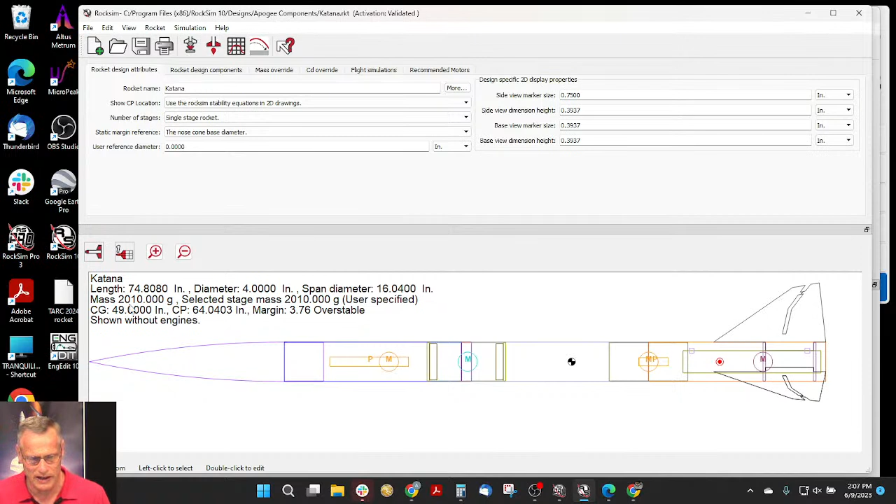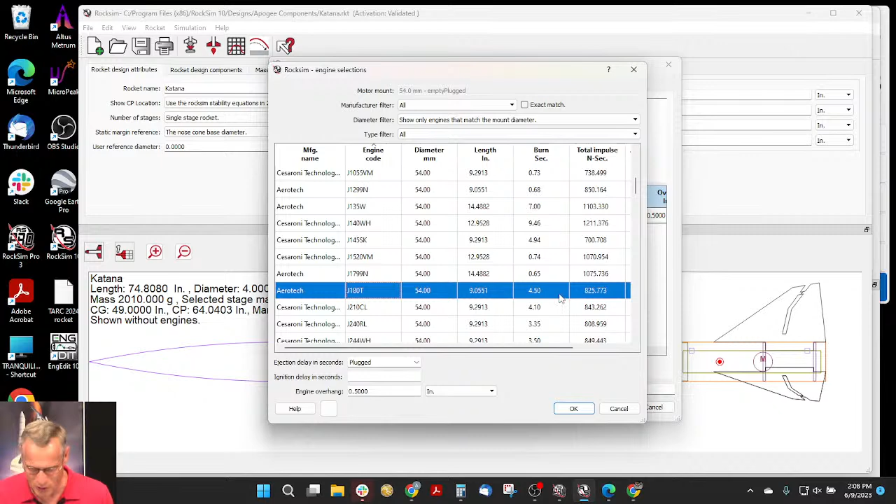So now let's load a motor in here and find out if RockSim does account for the casing weight. Let's choose an engine, we'll go with the J180, doesn't matter. If you look over here, it doesn't tell me the motor weight. But let's load the engine anyway, so we'll just load it and select the delay, 14 seconds. Click OK. So now we went from 2,010 to 2,850 grams, so obviously we added a motor plus the propellant into this rocket.

So now let's do a launch. We're going to go up here to the top, this is 'prepare for launch,' and this little icon is the rocket with two arrows pointing down to the launch pad. So we'll click on that, that's prepare for launch, and again we're back to where we were, we had the motor in here. Let's just set this up for a flight.

This is actually a dual deployment rocket, and we have a parachute and a 48-inch parachute. So I'm assuming this is the smaller parachute, and we'll deploy that one at apogee, and this other one we'll deploy at an altitude, so we'll scroll through here and specify an altitude of, I don't know, 600 feet, and hit tab. Okay, so now we've got our parachute set up.

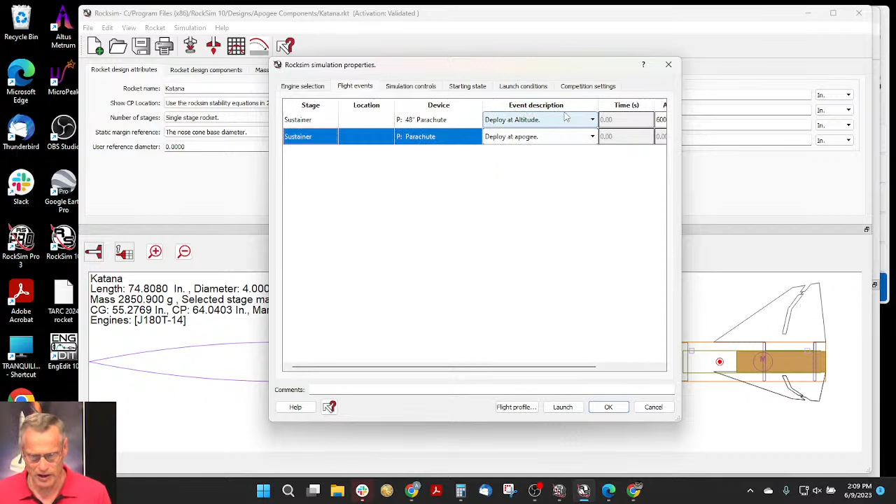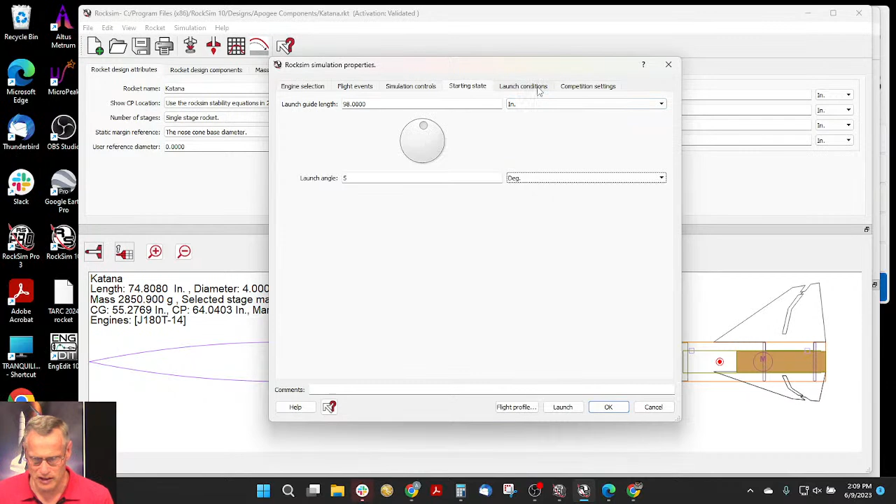The starting state, we need to be at a 98-inch launch rod, because this is a high power rocket, that's 8 feet. Launch angle, we'll give it a 5-degree tilt, so we're tilting that way 5 degrees, and launch conditions, we've got an 8-mile-an-hour wind coming through, and let's see the flight profile. So we're just running a quick launch here.

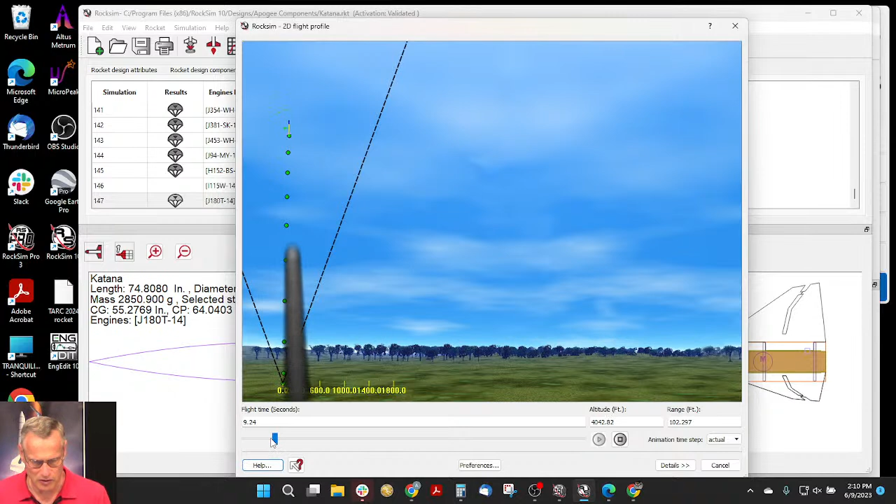So here's the rocket taking off, and the rocket's going up, and I'm going to grab the slider bar here and speed it through the flight. So we can see the rocket did come down. These dots are 1 second apart, so when the dots are going further apart, the rocket's accelerating, when they start getting closer together, the rocket's decelerating, and when they look to be about the same distance apart, that means it's flying at a constant speed.

So here's a constant speed, and it's coming down, and then all of a sudden it changes right here, the dots get closer together, which means it's coming down slower. So this is your classic dual deployment trajectory, where the small parachute allows it to come down really fast, and then the big parachute opens up right here, and then it comes down slower.

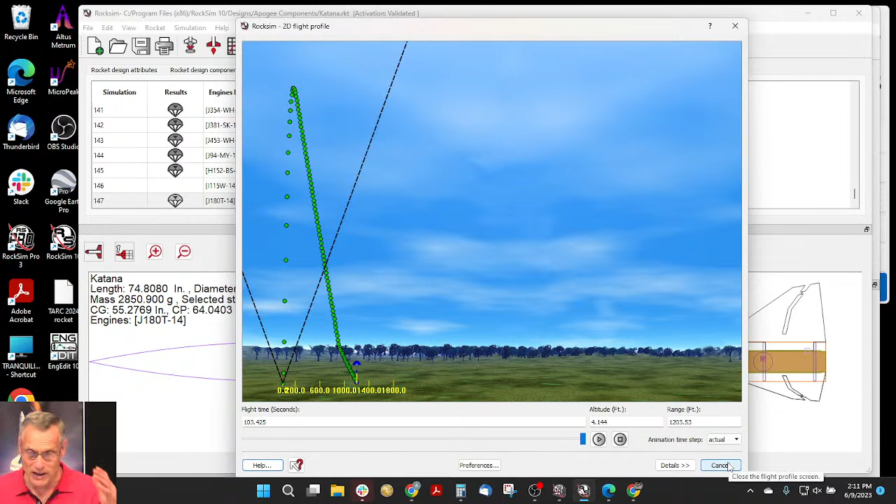Okay, so now, does RockSim account for the casing weight and the propellant weight? We already loaded the motor in here, and you saw that the mass changed, so now that includes casing and propellant, or casing, or just propellant. So that's what we want to know.

So what we'll do is we'll go up here to the graphs, this button up here, we'll go to plot. On the x-axis it's going to be time, and on the y-axis, let's find mass.

There's mass right here, and let's see if we can get altitude. Here's altitude, and then we'll clear out this one. Let's go to the end of the data, and then we'll plot this graph.

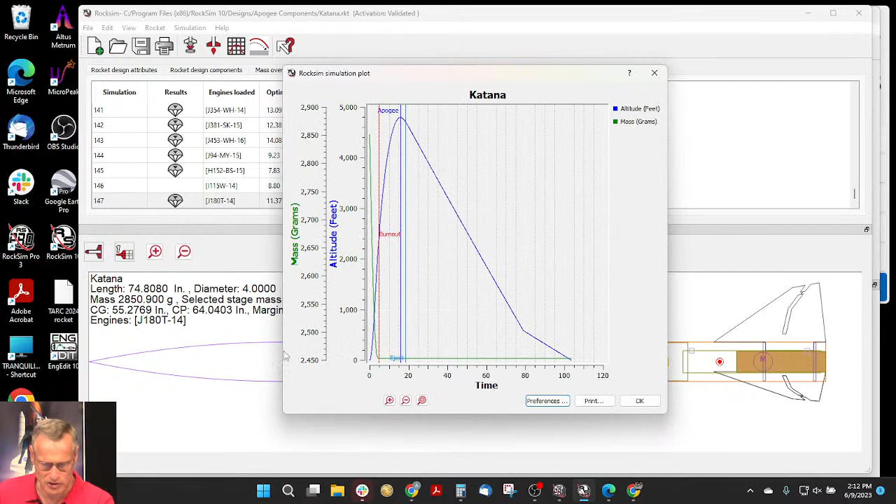Here is the graph. Let me make this bigger so we can see it better. This blue line is the altitude, similar to that trajectory, but this is altitude only, and you can see that it does slow down here.

What we're interested in is the green line, which is the mass. It starts at a high mass right here, and then drops down to here. Let me make this bigger so we can see it.

I'm going to stop this graph around 10 seconds, because after that the green line flattens out and the mass isn't changing. So to change this, we'll go back to preferences, set the graph data ending point to say at the following flight time, type in 10 seconds, and plot the graph. Now we're just looking at the first 10 seconds of the flight.

What we notice here is that liftoff mass is about 2850 grams, and then it drops down and bottoms out here. What I want to show next is the thrust of the motor, so I'm going to go back to preferences.

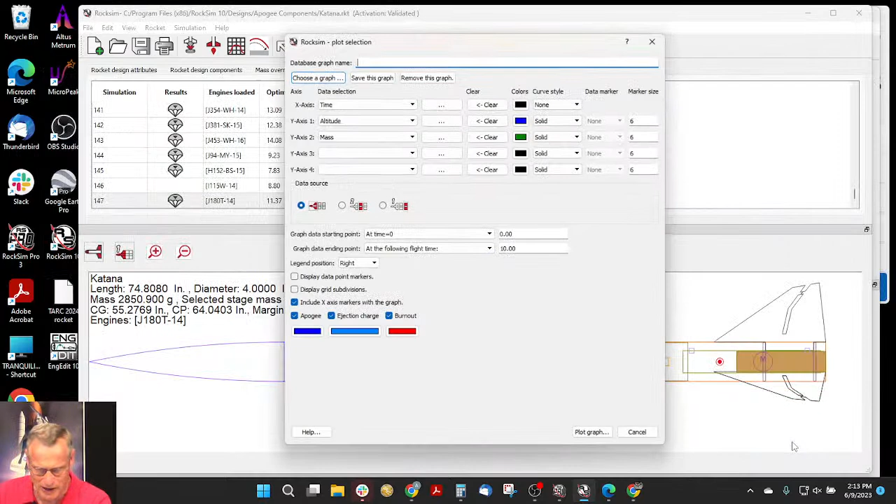I'm going to clear out altitude and put in thrust. Here's thrust, and then plot the graph. Now the blue line is the thrust of the motor, and we can see when burnout occurs right here.

This is our burnout, and you can see that the mass of the rocket is getting lighter and lighter until we reach burnout. At burnout, we're approximately 2,460 grams, somewhere in that area. So that's our burnout weight.

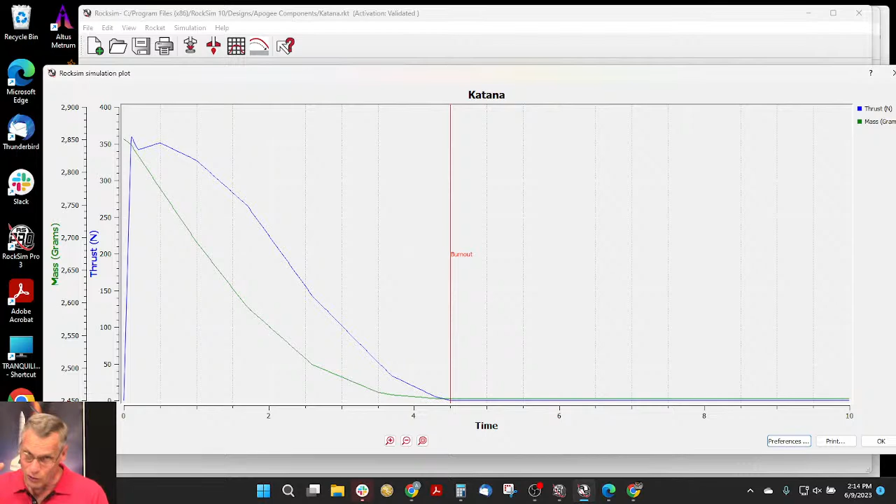But I don't know if you remember, when there wasn't a casing loaded, when we didn't load a motor, we were around 2,010 grams. Now with a full motor it was 2,800-something, but now we're down to 2,400. That tells me it's accounting for something—there's extra weight in there. I'm guessing it's probably the casing.

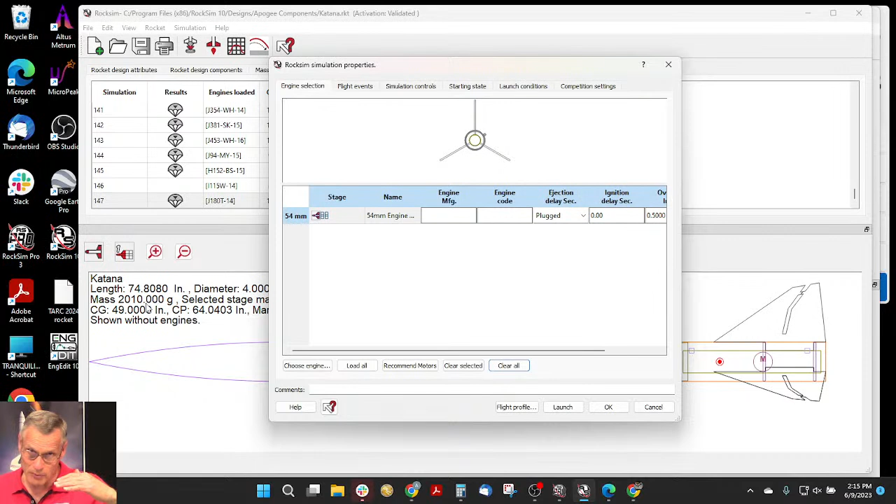So let me go back and take this motor out. Right now at liftoff we're at 2850, and I'm going to unload the motor, clear all, and it dropped down to 2,010 grams. Then when we loaded the motor it was 2,800 grams, and at burnout it was 2,400 grams. So that tells me that yes, RockSim is including the casing weight of the motor when you reload a motor.

So you don't have to do anything different when using RockSim when flying high power or any reload motor. RockSim knows the weight includes the casing and the propellant, and during the flight the propellant burns off and goes away—that's why we saw our mass coming down. So hopefully that accounts for the first question. It was kind of long, but I wanted to walk it through just to show visual evidence that RockSim is accounting for the casing weight.

The 3D printer guy says, being British, I hate the heat—anything over 20 degrees centigrade is too hot. Yeah, but do you have humidity? If you do, then it's too hot. If you don't have humidity, it's more tolerable.

Rosa is from Ottawa, and they're here. Carlos K says, bar quiz question: what is the oldest rocket engine that you have successfully launched?

I just found a lot of 20-year-old plus motors. I've launched some pretty old motors, if they're stored properly. What really hurts motors is humidity, so if they're stored in a dry container where the humidity doesn't fluctuate much, and the temperature doesn't fluctuate much, they'll last a long time.

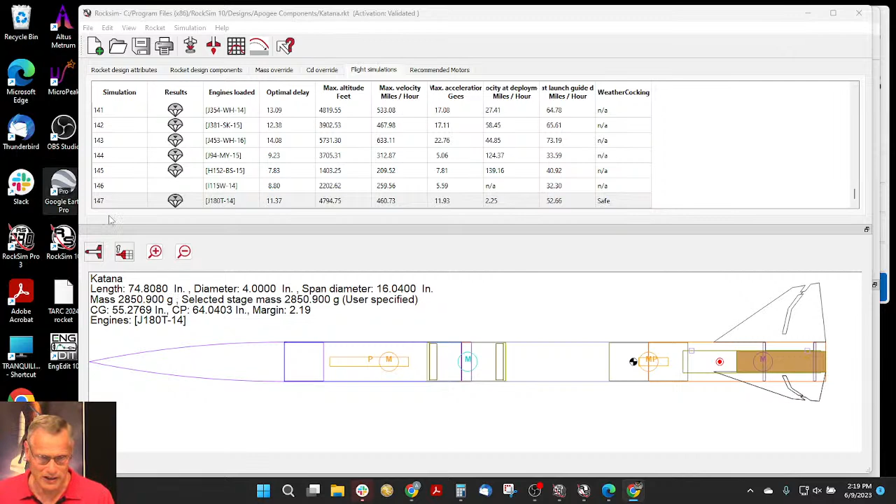I'm going to go back to the rocket simulation we just ran, and this time let's show velocity, and let's show, I'm looking for coefficient of drag. Drag, okay, CD. We can also plot the total drag force right here. Let's make this 20 seconds and hit tab, and let's see what's going on.

Our blue line here is the velocity of the rocket. As the rocket's taking off, it reaches peak speed a little before burnout, probably because we have a high thrust motor where most of the thrust is at the front end, so it's actually slowing down as it's burning. But at burnout it really drops off, and then it arcs over the top. This is apogee, and it picks up a little speed as it's starting to come down. Then at ejection, the parachute comes out and it levels off right here.

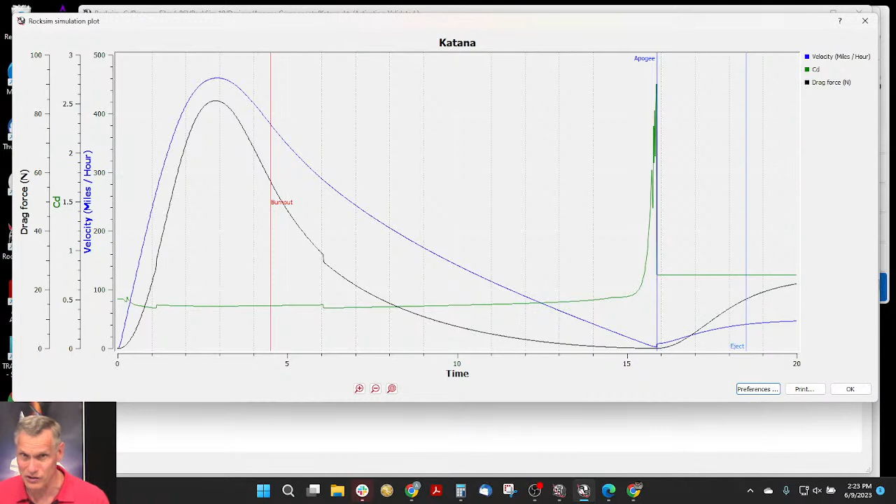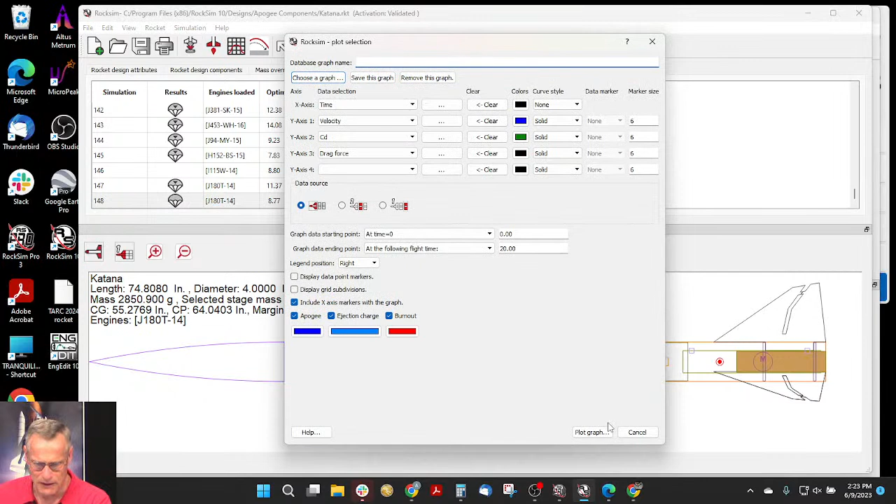One of the things you could do is go to the CD override right here, and uncheck this box, and then it will use this value, like 0.75. If we run a new simulation, the only thing changed between this one and the last is this one uses a fixed coefficient of drag of 0.75. So if we plot it, you'll see the line stays flat right here. See that drag coefficient line? It stays flat until it gets to really high angles of attack, when it starts to arc over as it gets closer to apogee.

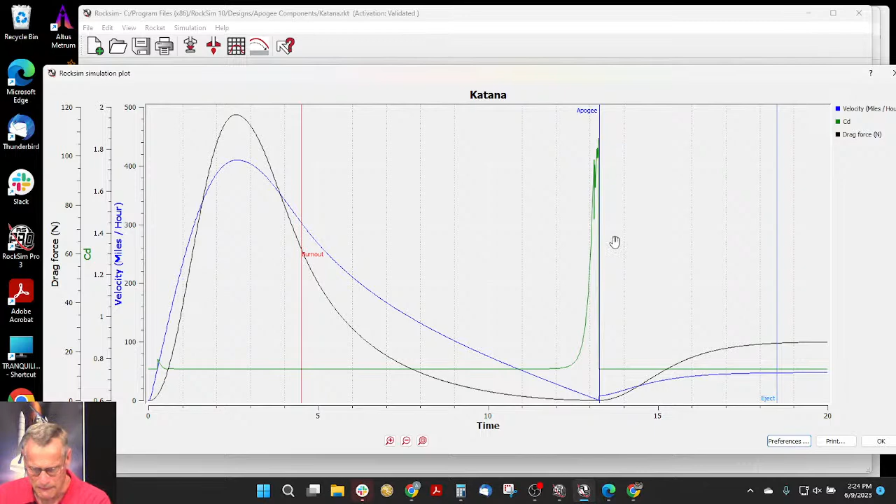So you can adjust the coefficient of drag. If your value, if here on this motor, the flight went exactly 4,000 feet. So how do I get to exactly 4,000 feet? You'd adjust that coefficient of drag. I need a little bit less drag to go a little bit higher. So instead of using 0.75, we could try 0.7 and then run the simulation again.

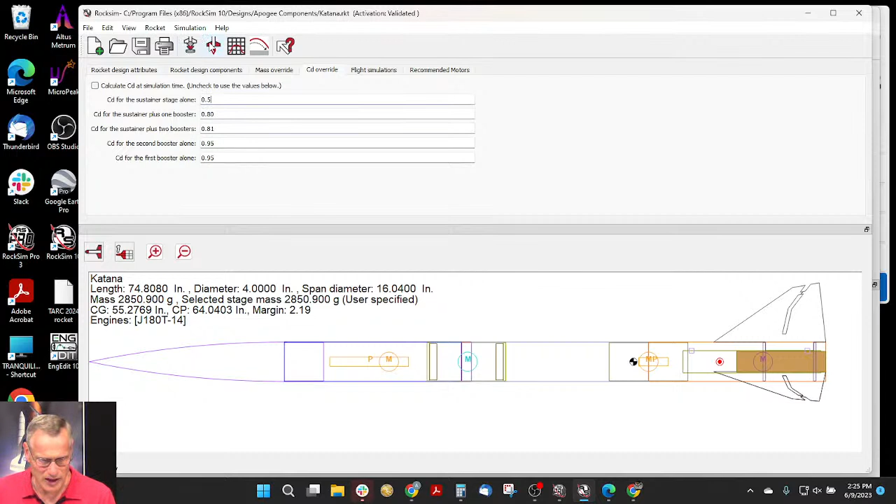And I went from 35 to 36, not quite enough. So then I'd come back here to coefficient of drag, and I'm probably going to have to use like 0.5. And try that. And now it's not too high. So somewhere between 0.7 and 0.5 is that value that we want to zero in on.

But then if you change a motor or if you change your launch conditions, you're basically throwing in more variables. It's going to be, no matter what program you use, it's going to be hard. I wish I had a better answer, but in reality, coefficient of drag is just so hard to predict.

Okay, Ashley says, okay, wait a minute. Arta Applewhite, wait a minute, I'm going, there's a lot of questions coming in.

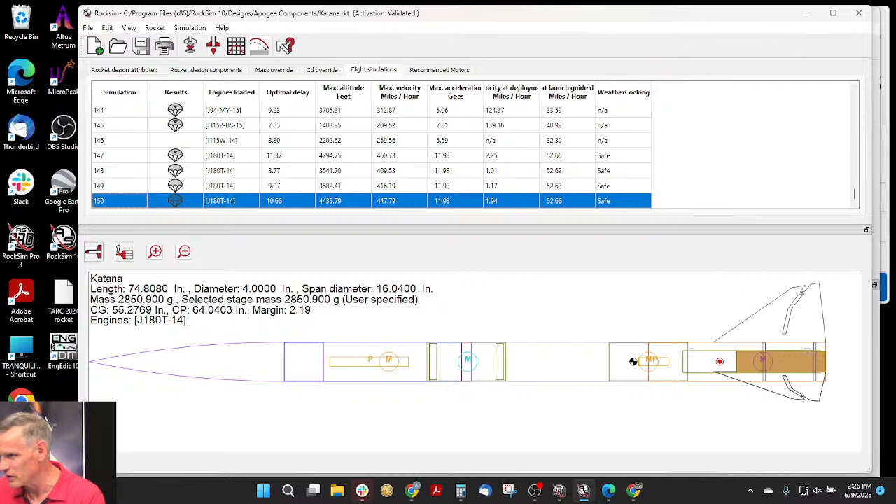Arta Applewhite says, follow-up question: how could I account for the weight of spacers in a reloadable motor? For example, a 1-grain G61 reload in a 3-grain case. Okay, so that's a really good question, Art.

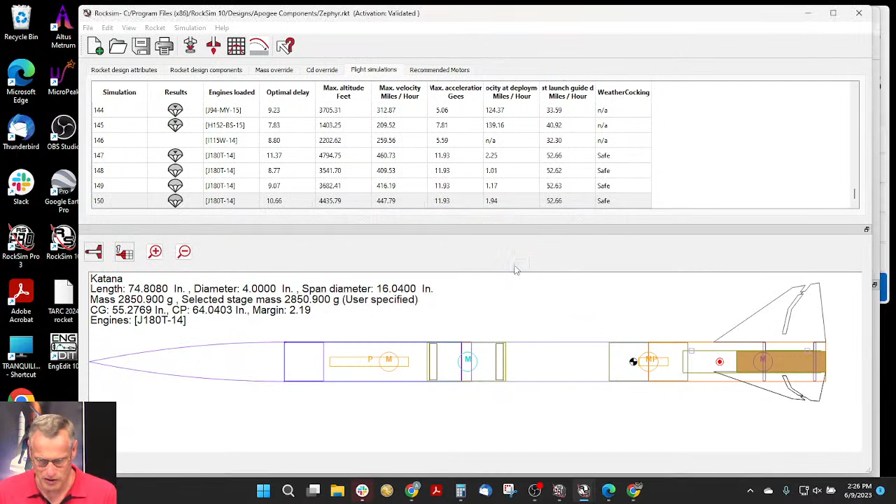Let's find a rocket motor that's a 38 millimeter. So let's go with the Zephyr. I know that's a 38. Save your changes? No, I don't care about that. Okay, so here's a Zephyr, and we're going to load in a G61, which is what Art is looking for. So I'm going to choose an engine, and here's the G.

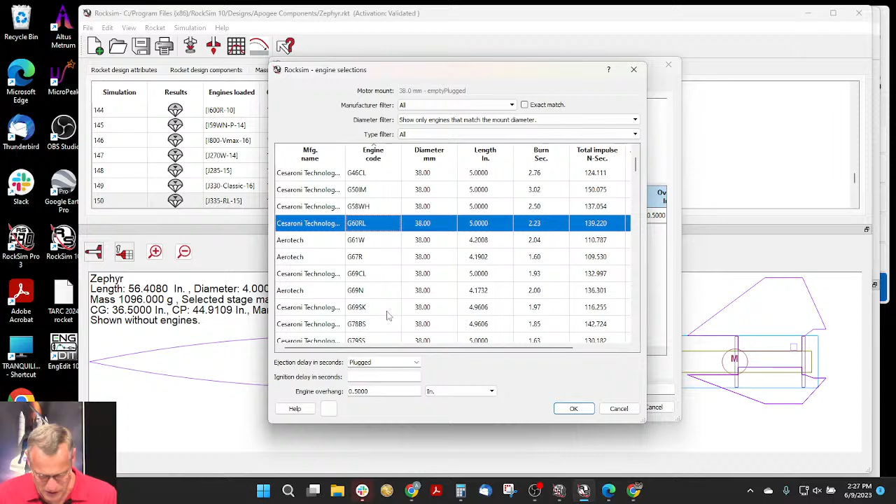Oh, he wants a Cesaroni. He's looking for a Cesaroni G61. I got a G60. Oh, let's go to the Apogee website and see if there's a G61. So on the Apogee website, just type in G61. Hit enter. I got an Aerotech, but no Cesaroni.

Oh, he is talking about Aerotech motors. I'm sorry. So here is the G61. So I'm going to go to the page, and I want you to note some things here. So the total mass of the G61 is 194 grams, and that includes the propellant of 61.5 grams plus the casing and everything else.

So a 38... I don't know what a 38-120 case is, the difference between these two numbers, because this is the case that it uses. Now let me open up a new tab. Okay, so now let's do an RMS 38/360. Okay, so here's the 38-360 casing.

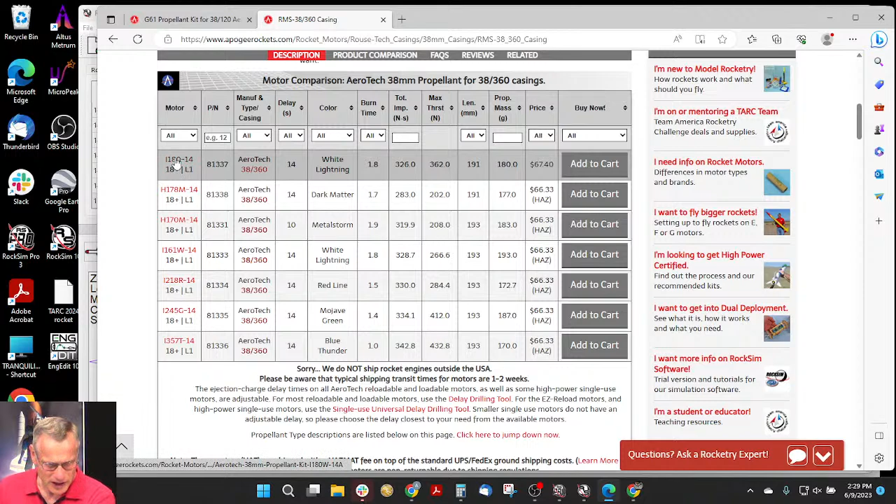Okay, so here is, let me get a calculator. I got a calculator open here. Okay, so we're going to take this number right here, 385 minus 180. 385 minus 180 is 205 grams, is the mass of the 38-360 casing plus the closures on it and all the stuff inside except for propellant. So 205 grams, and now that's the case we're going to use.

And then the other one, this one, it was 194. Let me go back to my calculator. Clear, where's clear? 194 right here, minus 61.5. This one weighs 132, so the difference between the two casings is 205 minus 132.

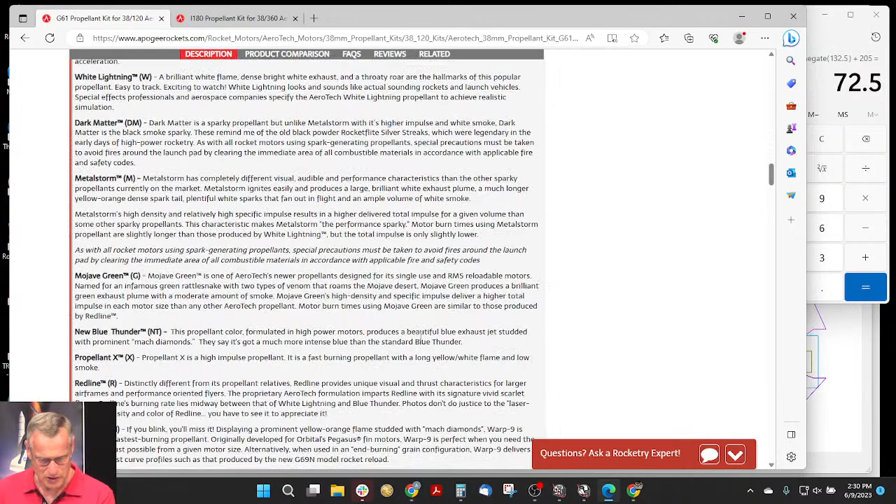So plus 205 equals 72.5 grams difference. So 72.5, that's the one thing, but now we need to add 2 spacers. So let's find, do we have spacers here? I'm looking for spacers. The spacers, they don't come by themselves. I don't want rocket motors.

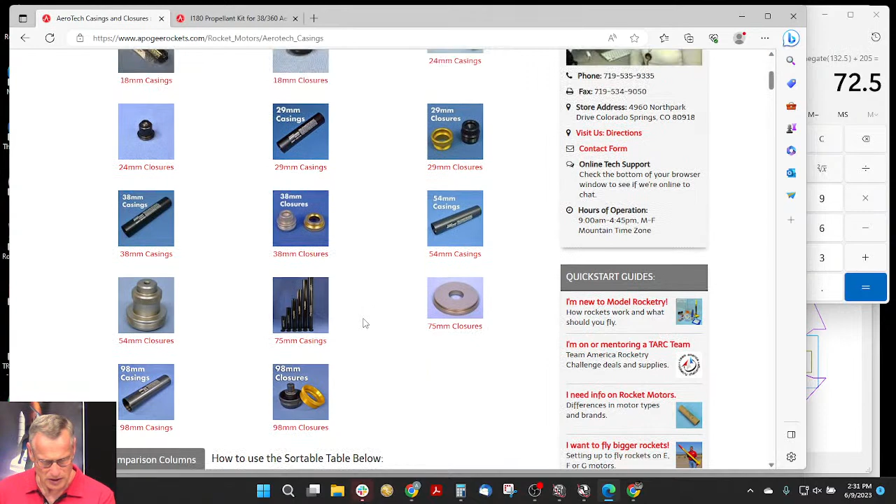I want Aerotech casings and closures. And I'm looking for the reload adapter system. Reload adapter. There they are, 2938.

Oh, and there's no weight here either. But, so we have the difference between the casings, and then we have to add the weight of these 2 cylinders. Those are the spacers. Let's say they weigh 15 grams each. So that's another 30 grams. So we're going to take 72 plus another 30. I'm just guessing here, 102.5 grams difference.

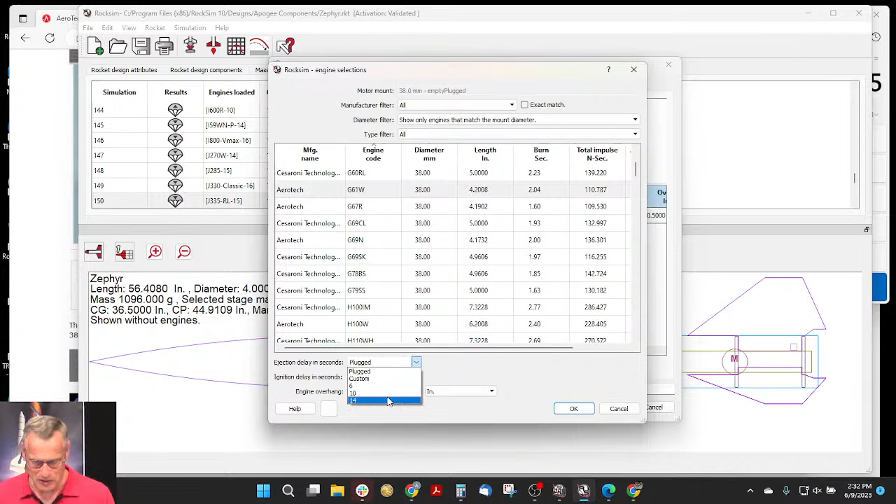So now we're in RockSim. We're going to select the G61. Yeah, we're going to say a 14-second delay. And now we need to account for the difference in weight of the extra length of the case plus the spacers.

RockSim doesn't have this built in. You're doing the right thing, Art, trying to figure it out. So what we need to do...

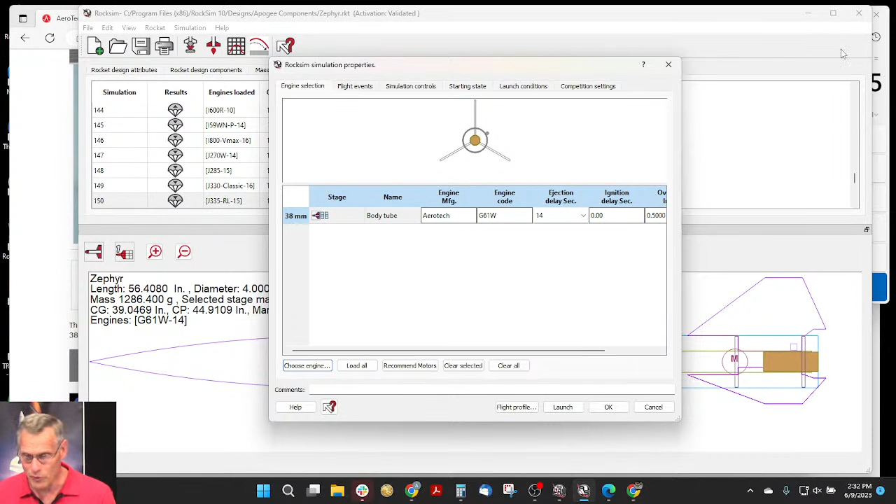Flight events, I'll just leave everything okay. So we loaded the motor with the G61, but at this point we haven't included the extra weight. We need to throw in another 102.5 grams, which is the weight of the spacers, plus the extra length of the case that we're going to use.

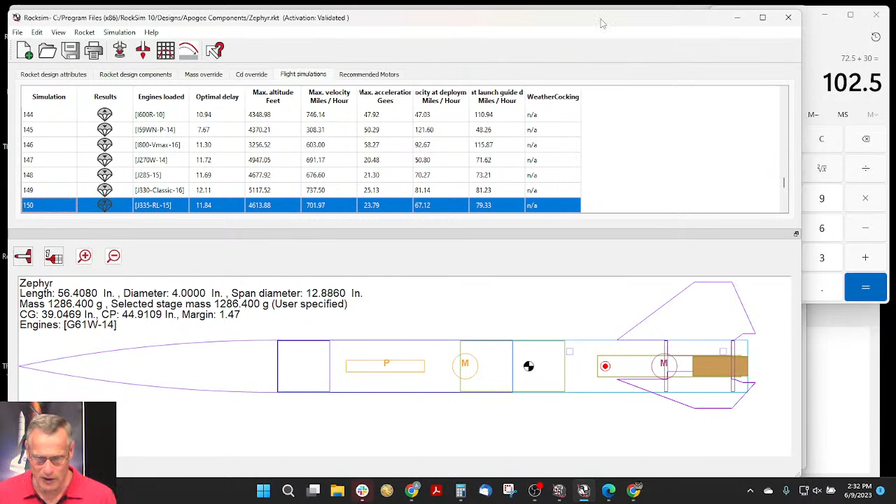So I'm going to put that in as a mass object. It's going to be a circle with an M in it as a mass object. So I'm going to add it, and to do that, come here to Rocket Design Components.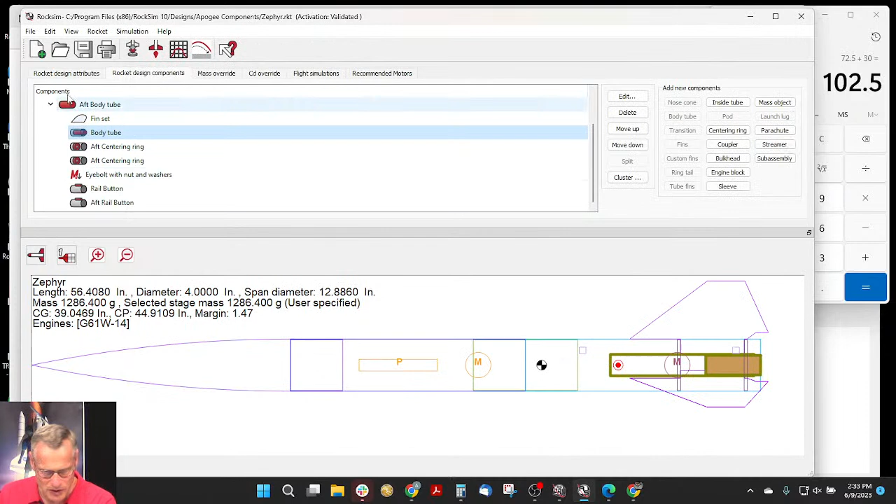We're going to add it into the motor casing, this tube right here. Oops, I didn't want to open the casing. Save your changes? No. I wanted to add a mass object to that, and the mass object is going to, this is the database.

I'm going to cancel out of the database, and so I get to this screen. I'm going to call it spacer plus extra 2 grain casing mass.

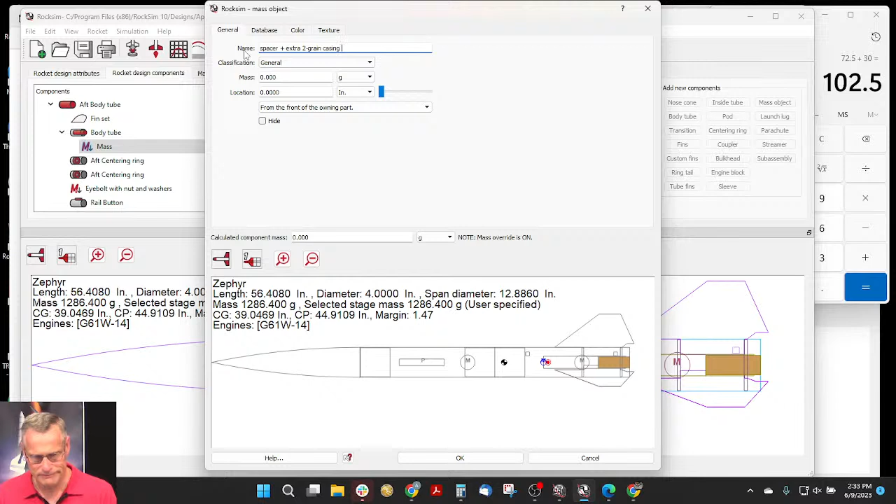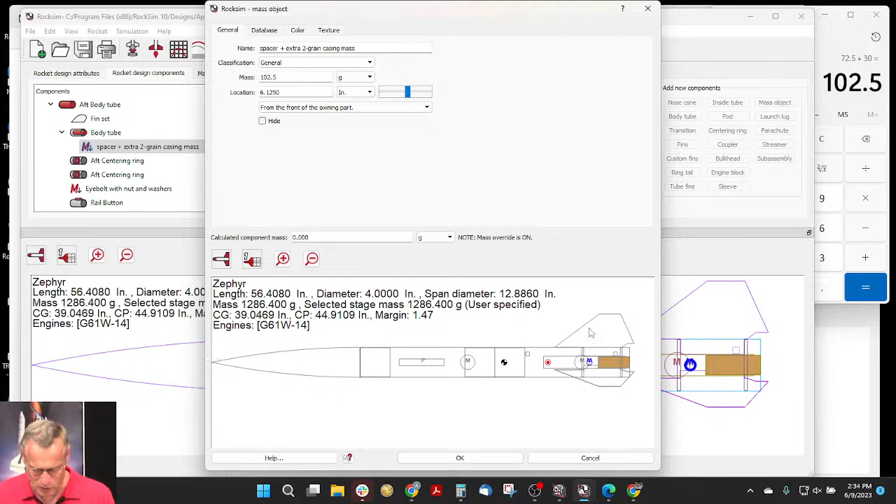And it's going to be 102.5. Right now it's putting it right at the front of the motor, and I'm just going to slide it back a little bit. I want to put it approximately where that extra mass is going to be in the rocket, and it's probably going to be somewhere right there. I'll click OK. So there's where I added the new mass of the extra casing and the spacers.

So then you can do a launch, and you can look at the flight profile, and the rocket takes off, and it's mostly going straight. It seems a little slow, but we'll take a look at that in a second. And it's coming down a long way, coming down sideways. Oh, and it just opened pretty close to the ground.

The maximum altitude of this rocket was 786 feet. The number I want to look at here is the velocity at launch guide departure: 35.8 miles per hour. That's actually okay. I like to see that number above 30.

Some people like to see it higher. When I was at National Sport Launch on Memorial Day weekend, the safety officer there said he'd like to see it at 50 miles per hour coming off the launch pad. That's quite a bit faster, but I can see their point. They're at a big launch with a lot of people, and they want to make sure everything's safe.

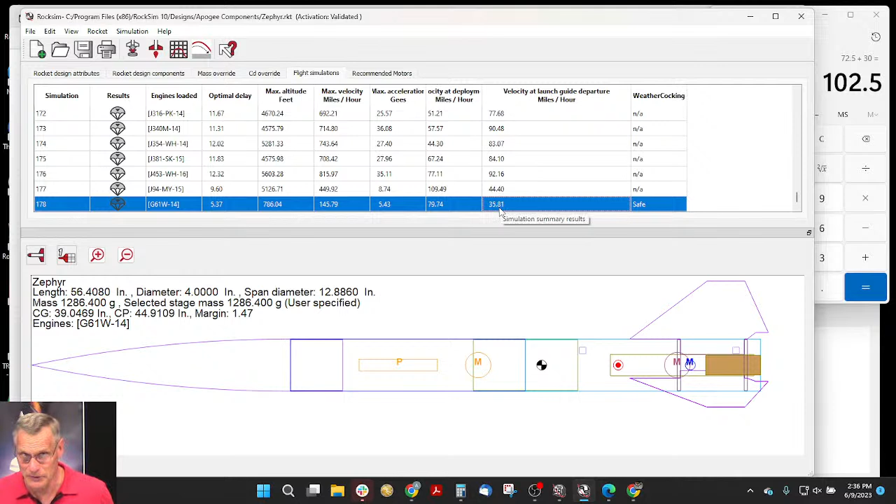So that higher liftoff speed, your velocity at launch guide departure, means when it leaves the launch pad, how fast is it going. They wanted to see 50. I like to see at least 30. When you get below 30, the rocket can start really weathercocking, and nobody wants to see that.

Okay, so hopefully Art, that answered your question. It's a hard question because you have to figure out the mass of the spacers plus the difference in mass of the casings, the long casing, and then subtract out a short casing, and what's left is the difference between the heavier casing and the smaller casing.

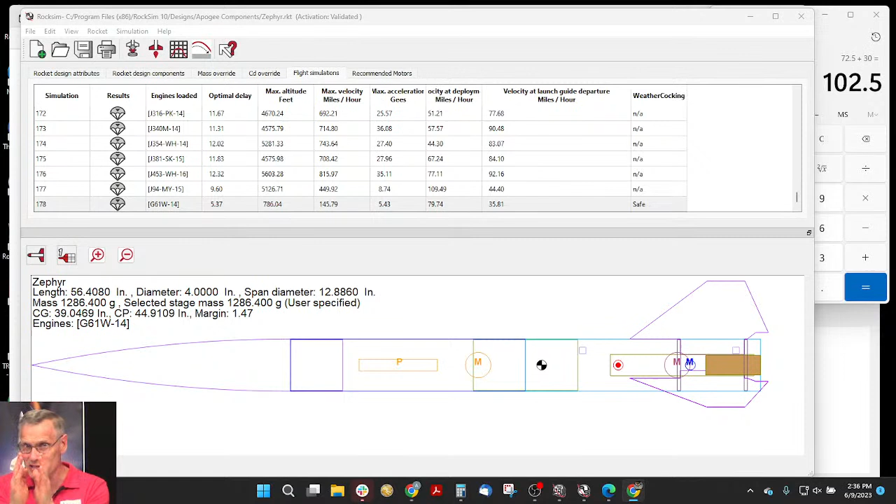Okay, Ashley's got a follow-up question. He says, okay, so it would account for the smallest casing. I get it now. So if I use a bigger casing and spacers, would I need to add a little mass? And the answer is yes, you do need to add mass.

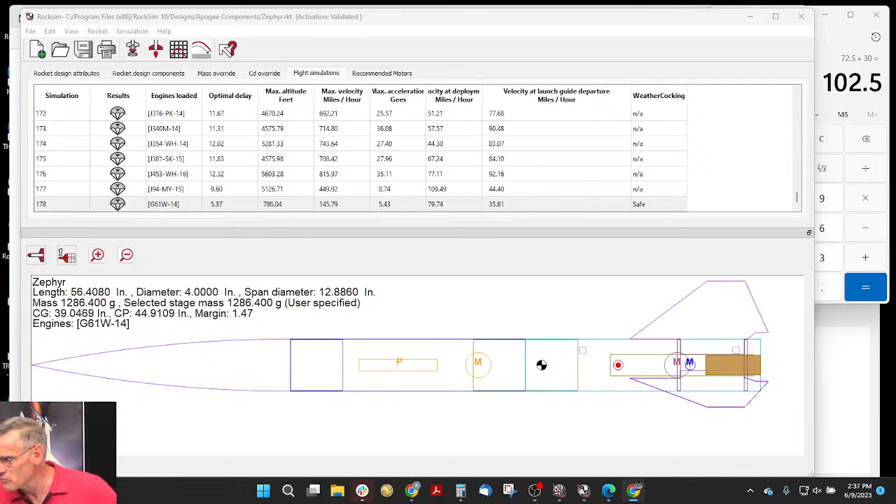Alfred Indy is in the house, and he says, in standard RockSim, since I had to reload the software package, how do I change the max speed to Mach speed? I am asking here because I am too lazy to watch the old RockSim videos.

Okay, so you got this maximum velocity in miles per hour. So how do you change this to Mach number? To do that, you got to go to the preferences. I always forget where it is on Windows. On Windows, it's under the Edit menu, and on the Macintosh, it's under the RockSim menu.

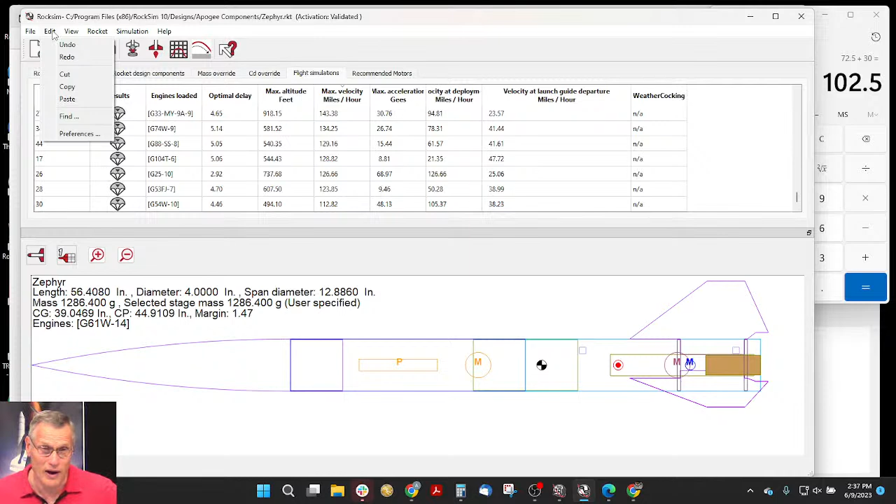So you come down here to Preferences, then go to the Units tab, and here's Velocity, and under Velocity you can change it to Mach. Once you do that, click OK, and you see right here, before we were at miles per hour, now we're at Mach number.

So this last G61 motor, its maximum speed was Mach 0.19. This one right here went over Mach. Look at that, it went supersonic with a J453.

Andrew Simon asks, does RockSim simulate MicroMaxx motors? And the answer is yes, it does simulate MicroMaxx motors. The question is, are the MicroMaxx motors loaded into your RockSim?

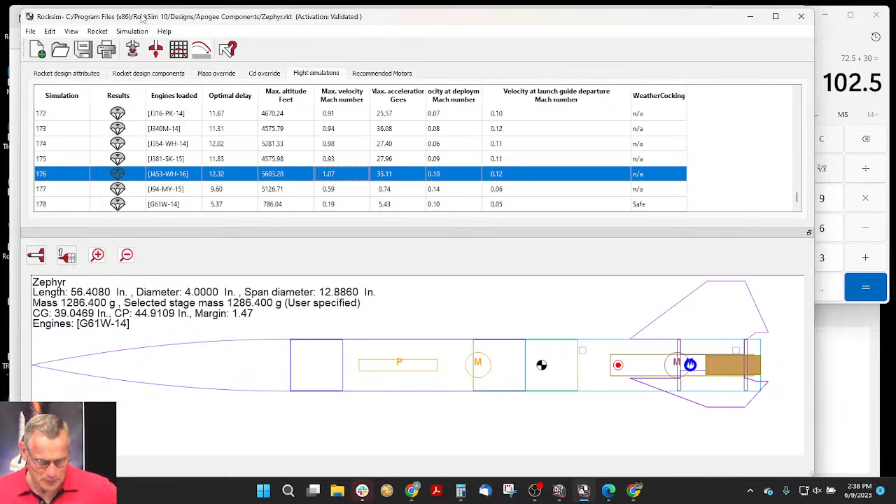Let's go to prepare for launch, and under Choose Engine, let's show all engines. Then under all engines, click on the diameter column and it will sort them by smallest to largest. You'll see right here at 6 millimeters in diameter, there's a Micro Maxx rocket engine.

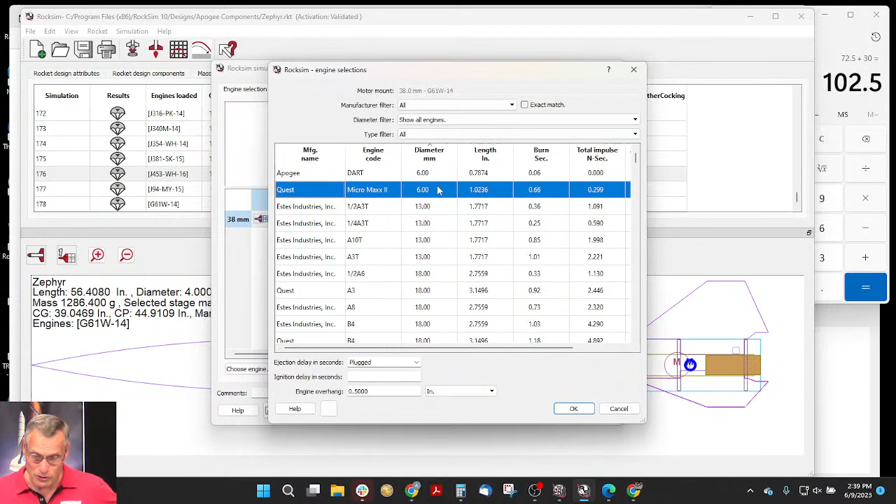So I'm going to load a Micro Maxx into the Zephyr here, and we'll go launch. Look at this, the rocket did not leave the pad. That little tiny Micro Maxx motor did not move that rocket at all. Just not enough thrust. So yes, RockSim does simulate Micro Maxx motors.

Terry Wheelock asks, what is the best type of image file to use in RockSim? I'm not sure I understand that question, Terry. So what's this in regards to? What are you trying to do? And then what do you mean by best? So there's two questions I'm asking you.

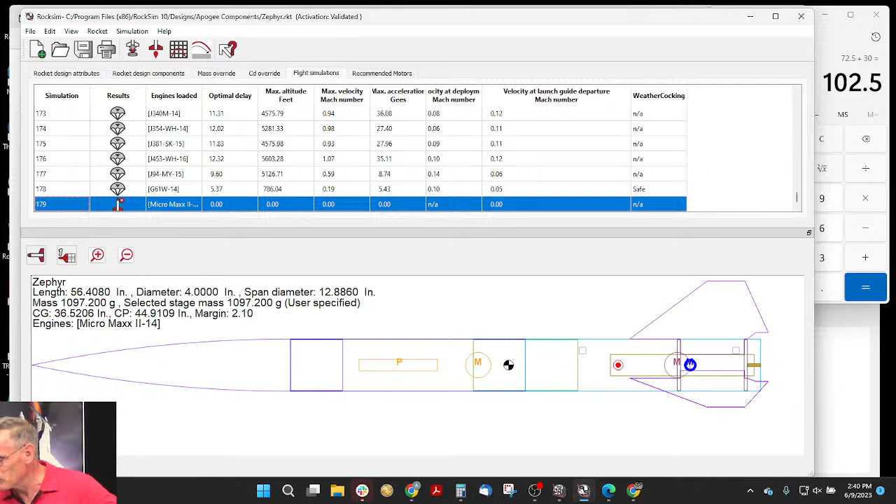Carlos K. asks, what altitude above sea level is Wally launching from? I have no idea, Wally will have to answer that one. Wally says, oh thanks Tim, that gives me something to work with. I launched in Virginia, elevation near 600 feet.

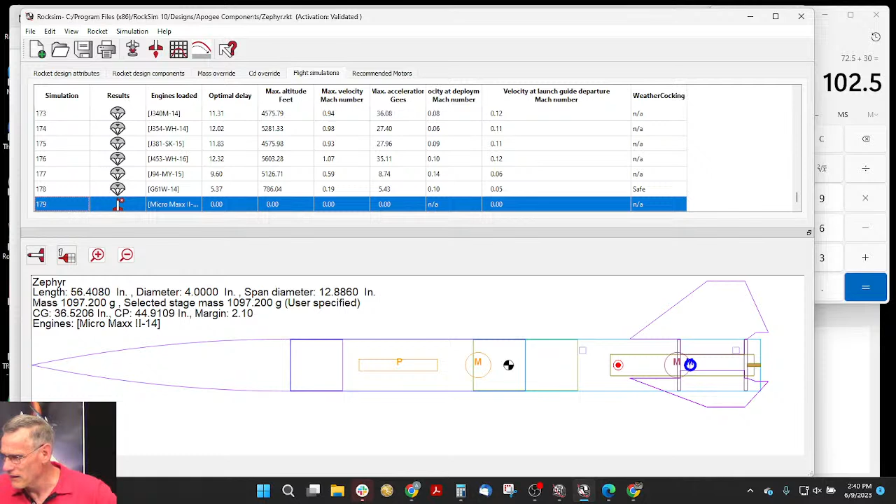Well, there you go. For painting, oh okay, that's what Terry's talking about. So he's painting his rocket. So let me see, if you go to the 3D view right here and click on that, this rocket does not have any painting, like decals, which I'm assuming he's talking about.

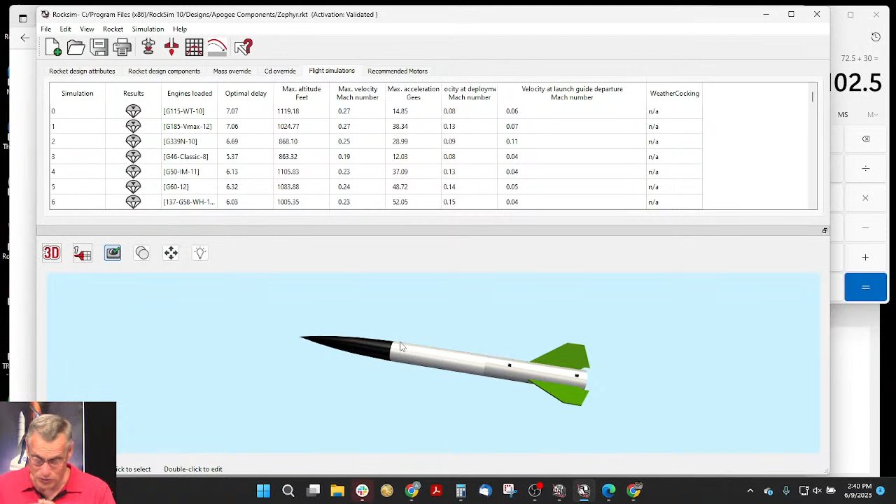So let's open a file that I know has some decals. You can go to the Apogee Avion, open that, and click open there. Open, save changes, no. Okay, so this one does have images applied. So these are decals, notice that the tube is not just a standard white tube.

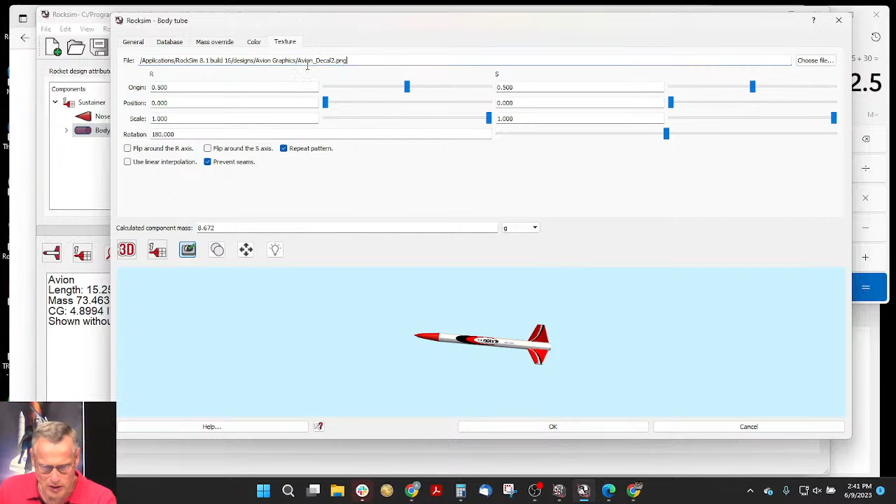It has a decal on it, and the fins also have decals on them. To apply those to the rocket, they're called textures. So under the body tube, if I come here to texture, it tells me the name of the file that has that texture image on it. So I'm looking at the file path for that image to see if I can open it from my browser.

And it's in Applications, Program Files, not that one. I'm looking for either RockSim or Apogee. How come I'm not... oh here it is, RockSim 10, Designs, Apogee, Apogee Avion, and then here are the decals. So here's that file, if I open it, it will probably open it up in something like Paint. We'll click Open, and it opens up MS Paint, and here is the decal file.

So that is the image, and really the question is what file format. This one was a PNG. You can also use JPEG, and I think those might be the only two options. I could draw something on here. Look at that, let's put a heart on my rocket. I don't know if I can paint that or not. Oh, look at that.

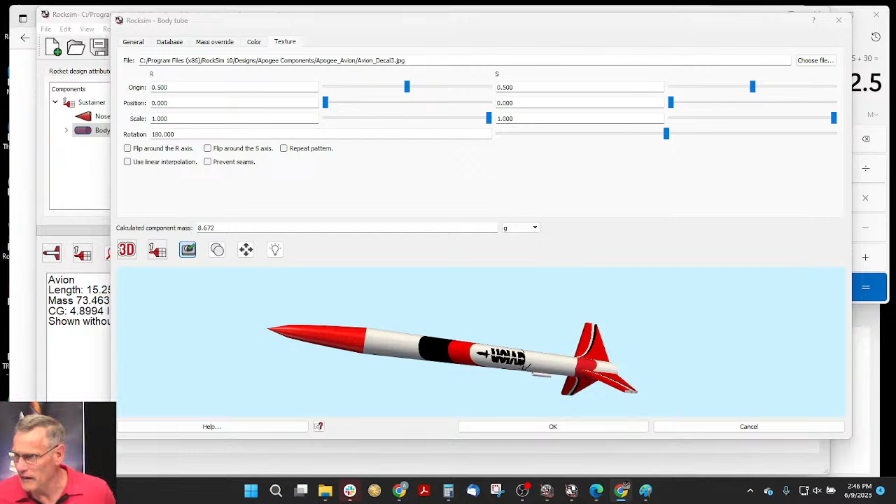Okay. Stopped working. Uh-oh. Okay, am I working now? Let me see. I got my screens open here. It shows I am working. Am I working? That's better, says Wally. I'm back. What did you miss? Where did I lose you?

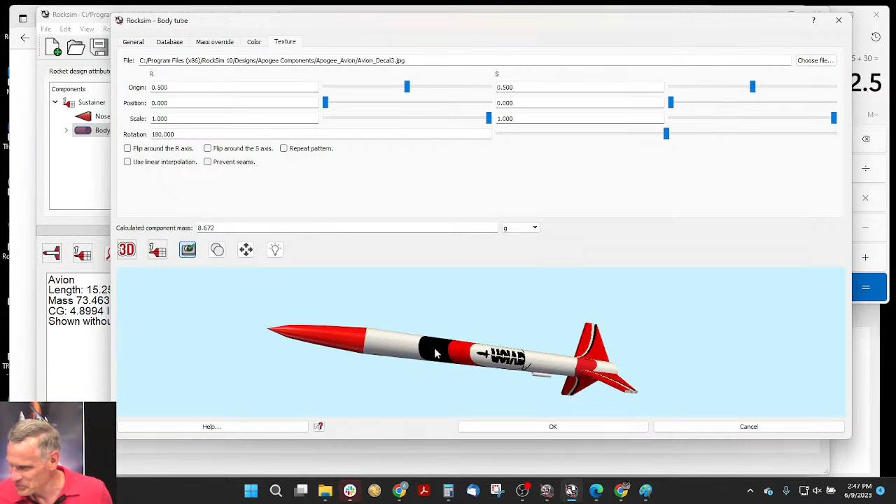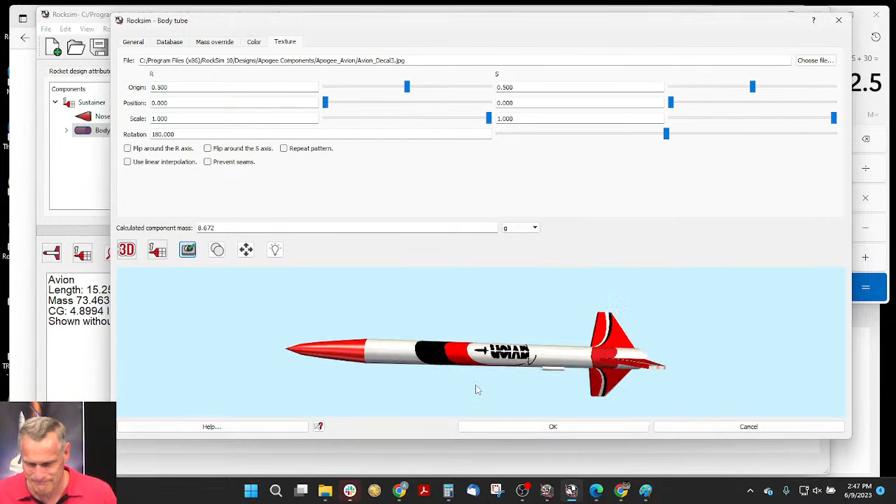We were talking about textures, and I changed the texture, and I put on a JPEG, but the file formats you can use are PNG, BMP, or JPEG. It doesn't really matter as far as which one's the best. I'm not a graphics guru, but there's only so much resolution you can put onto your rockets. When I zoom in, I can start to see it pixelating a little bit, and I don't know if I can do too much about that, no matter what format it's in.

3D printer guy asks, can I go anywhere to get decals printed? I don't know where to try.

Well, you can make your own decals. If you go to Amazon, you can search for decal printer paper, and there's two types: inkjet or laser.

These are water slide decals, so the paper you buy is special. Sometimes there's clear and sometimes there's white. The problem with printing your own decals is the color white.

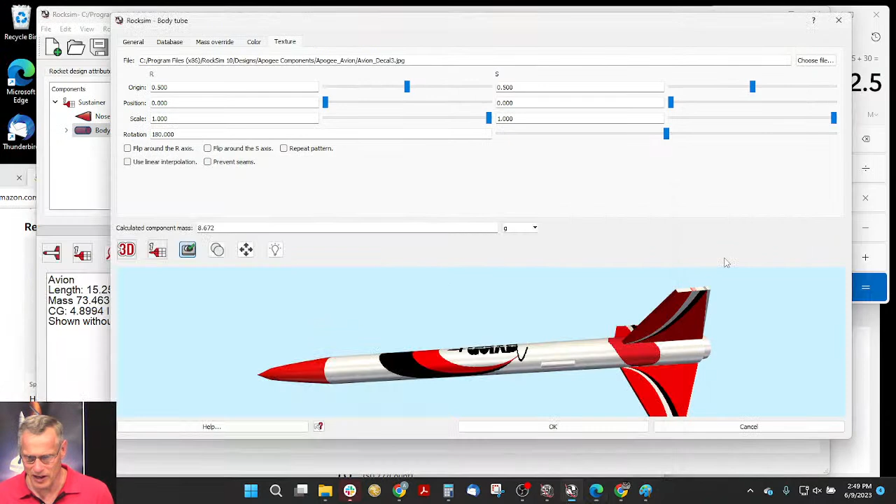If I go back to the Avion rocket, trying to print a decal like this, just a white stripe and a black stripe, it's pretty hard, because you can't print white unless you have a special printer that can print white. There are printers available that do that, but they're not cheap, and the toner or ink is expensive, but it can be done.

But normally you can print all your other colors except for metallics. Again, printing metallics is hard. So that's what I would do, and we do that a lot here at Apogee - we just buy it.

You can see how many different companies sell decal transfer paper, and they're water slides. So you print them, cut it out with scissors, and soak it in water, and the artwork will just slide right off. When it slides off, there's the carrier - there's kind of two parts of the paper: the backer, and then the part you print on.

Like I said, you can get either clear or white. So you can print on white or on clear, and then that will slide off, and you can put it onto your rocket.

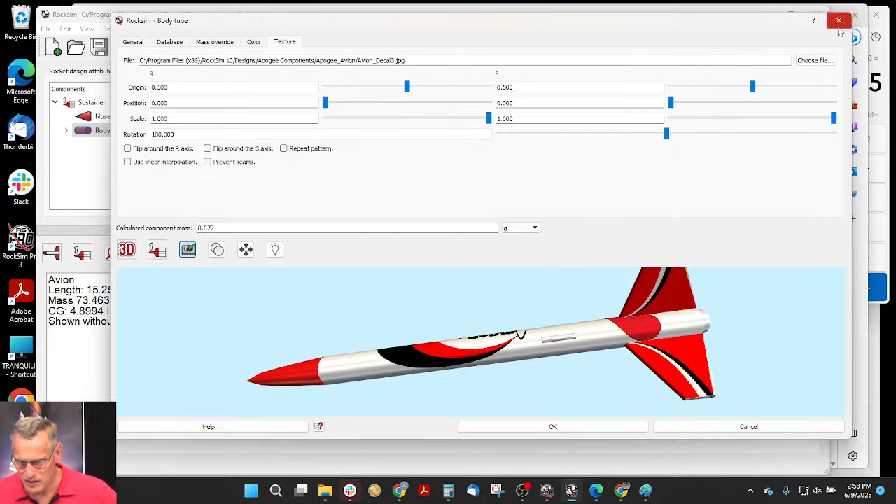I don't know if you've noticed when we looked at the Micro Maxx motors. First, let me find a two-stage rocket here. Let's go, Midge, open... Oh, it crashed.

I was saying, man, it took a long time. This happened last week too, and I told my programmer about it, and he wasn't able to find the crash, but we've never been able to find that crash. Let me open it up again and try it again. File, open. What was I playing with? The Midge.

Okay, so here's a two-stage rocket. Let's say we want to put a motor in the bottom stage, but nothing in the top. So now you have to do a trick - here's the trick to having an upper stage that doesn't have a motor in it. The trick is you've got to put a motor in it, but the motor can be a special motor.

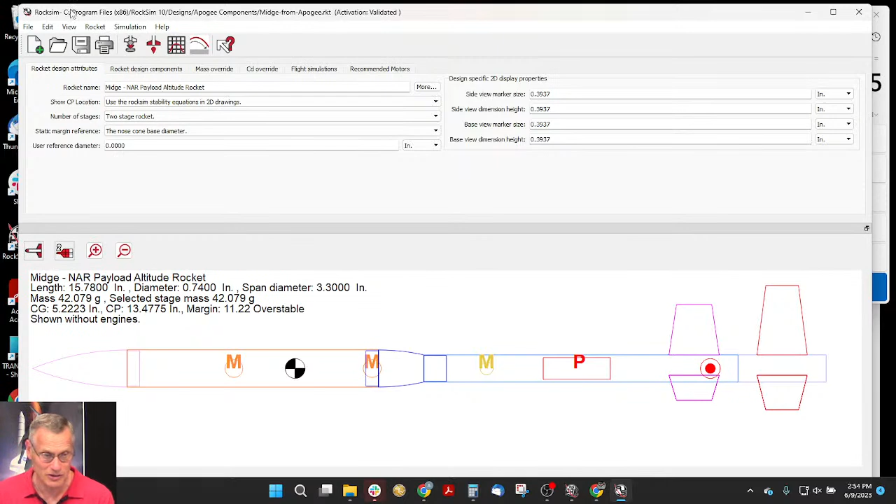I put a special motor into the engine files in the Apogee files. Oops, wrong button - I wanted to go to prepare for launch for this very situation. So this is our bottom stage; let me choose an engine in the bottom stage. We'll put an A10T-0 in the bottom stage. Then in my top stage, I'm going to choose an engine.

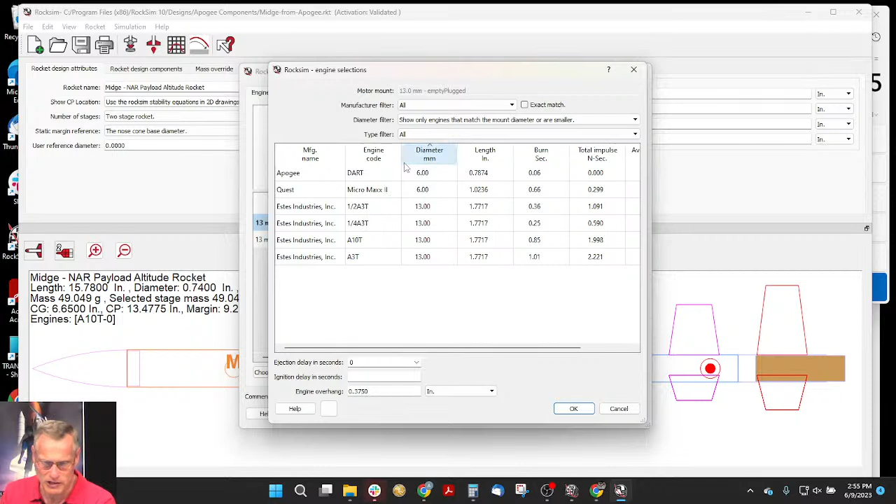Right now it's looking for only the engines that match the motor mount diameter, but if you select show all engines, or show engines that match the motor mount and are smaller, you'll see all these other motors, and I'll sort them by diameter. At the very top is a motor called Dart, and then the Quest Micro Maxx, both 6 millimeters in diameter. If we look at the total impulse of this Apogee motor, it's a total impulse of 0 - in other words, it's a motor, but it doesn't make any thrust.

And so we're going to use that motor in the upper stage. Did I choose it?

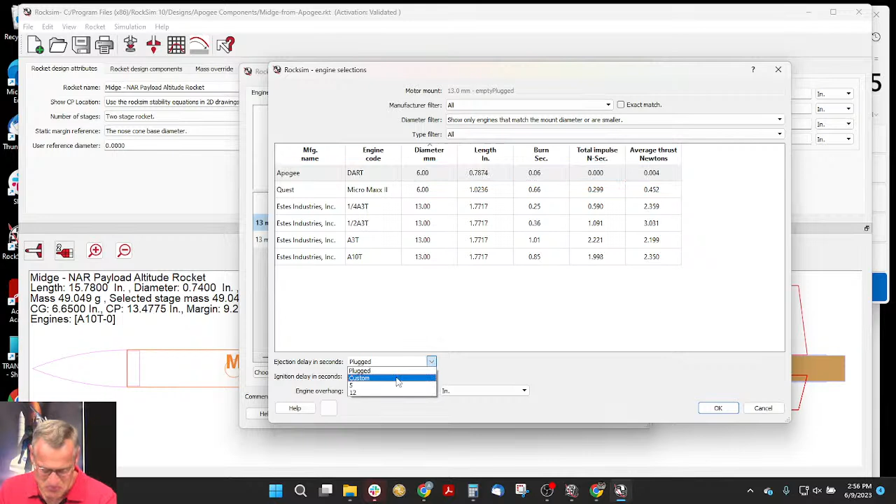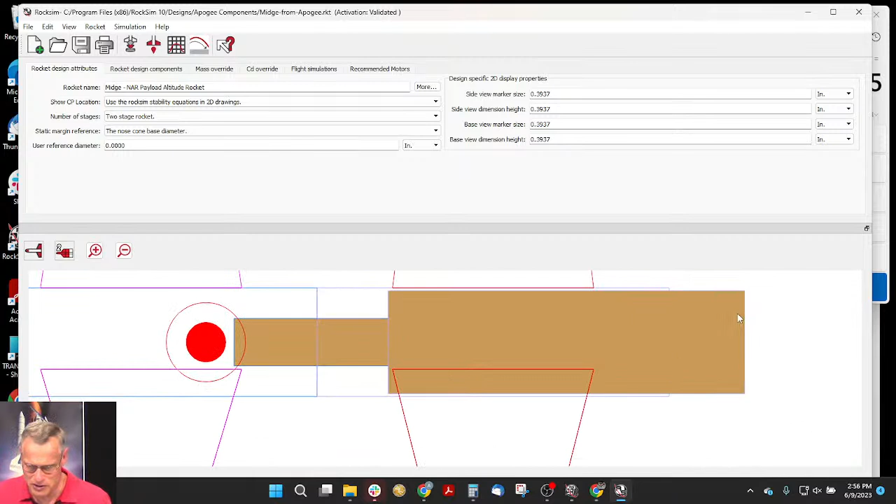Let's put in 9 seconds. Okay, so we loaded a motor in there. I'm going to say okay. So here is that little motor right here. Let me zoom in and slide this. So this big brown box is the 13 millimeter A10, and this one is the 6 millimeter Dart motor.

And when we launch this, let's see what happens. So let's go prepare for launch, under flight events. This one's going to deploy this Dart motor at maximum ejection delay. I think our maximum ejection delay is probably too high. Let's make it 5 seconds. It's probably still too high, but that's okay.

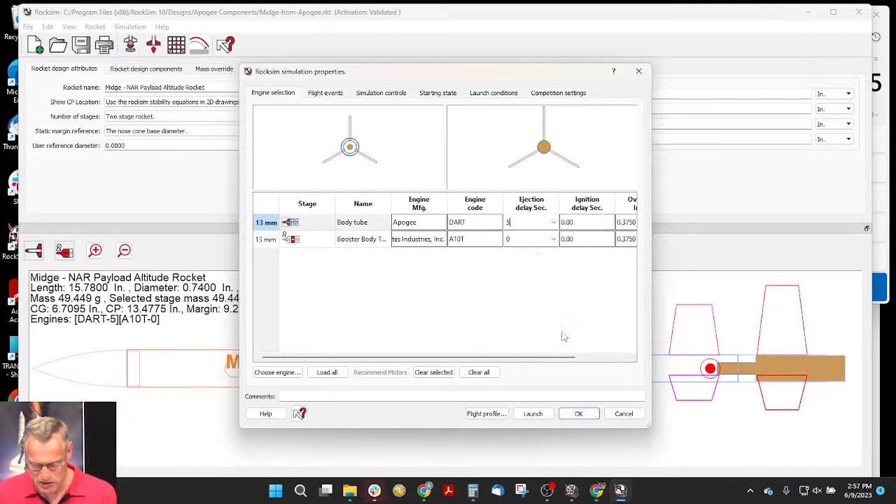And starting state, let's make it a 36-inch launch rod. Launch conditions, that's okay. Let's do flight profile. Okay, so here's showing our 2-stage rocket, and let's launch it.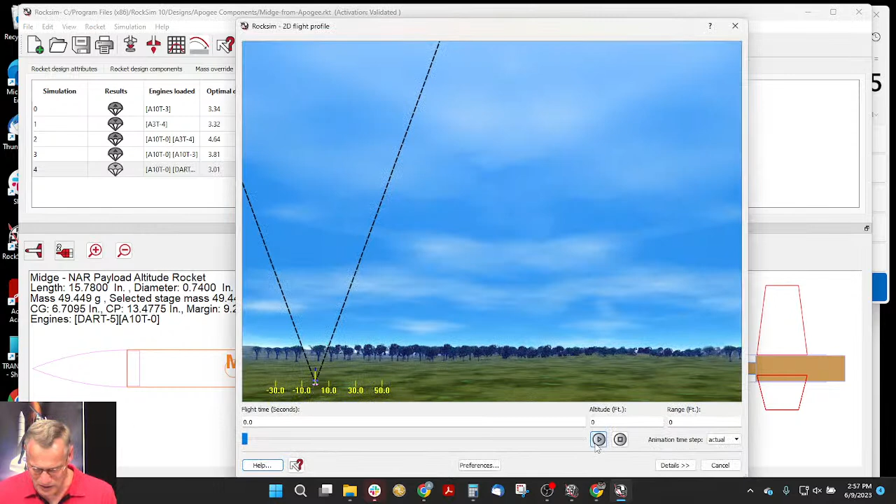The rocket took off. There's the booster. It fell down. The upper stage, it's unpowered, but you saw it separated, just like we wanted it to, and it comes down on its own parachute.

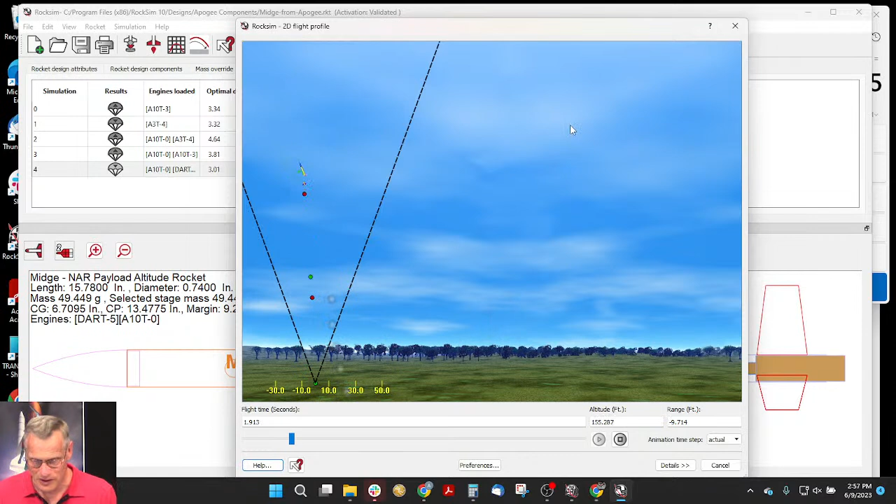And the parachute, how do you eject it out when it doesn't have an ejection charge? Well, then you probably have to use some sort of electronics or some other kind of timer system to eject it. So that is how you launch a rocket with a passive upper stage.

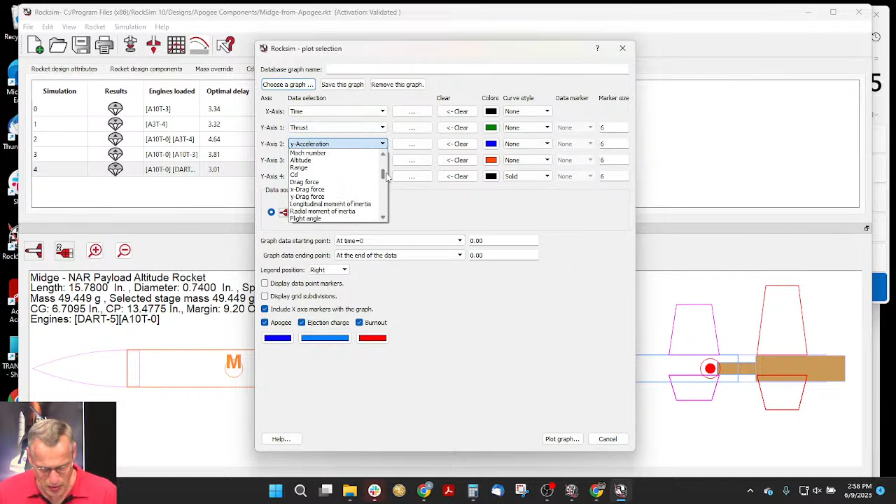So if I look at the graph on this rocket, let's display the thrust, the altitude, and velocity, and plot the graph. Let's make it a little bit bigger so we can see it.

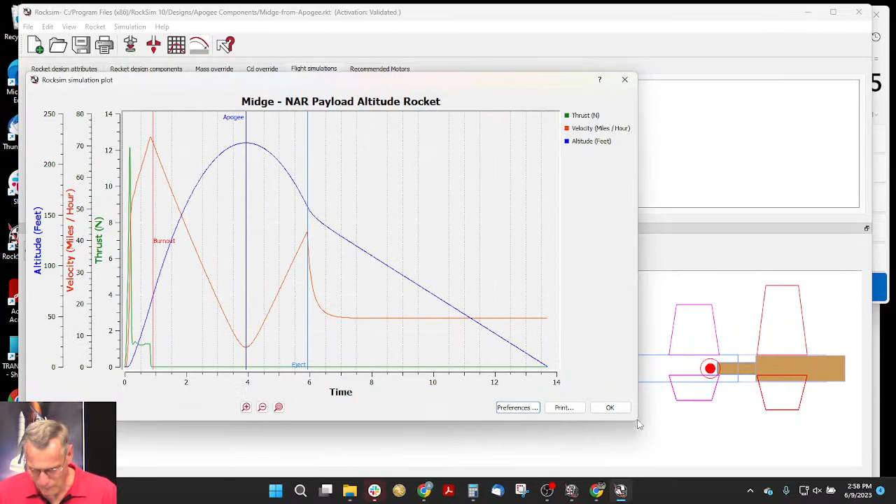Okay, so our thrust is the green line, and you can see it peaks up here to about 12 newtons, so that's an A10T-0. Here's the burnout. Then we have velocity. The velocity peaked right at motor burnout, and then it started coming down.

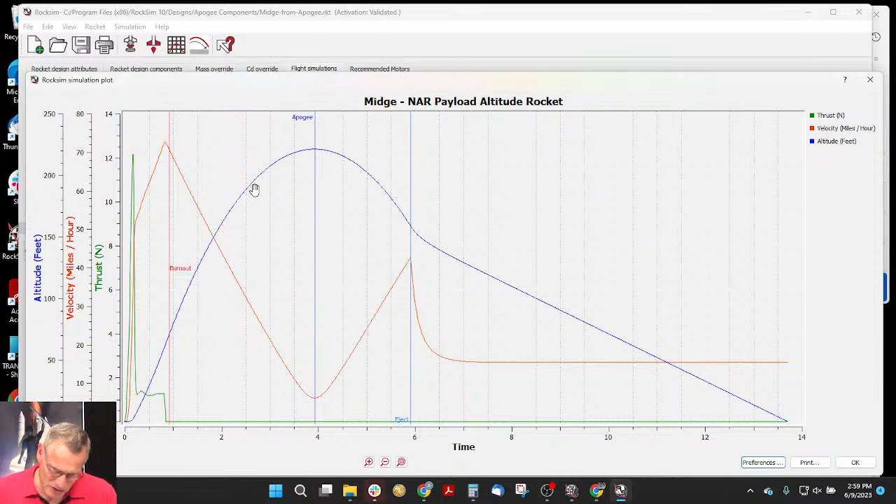And our altitude, here is the blue line right there. What else could we see? If we also show, instead of altitude, let's show the mass and plot the graph. Okay, it's really hard to see. So now the mass is the blue line.

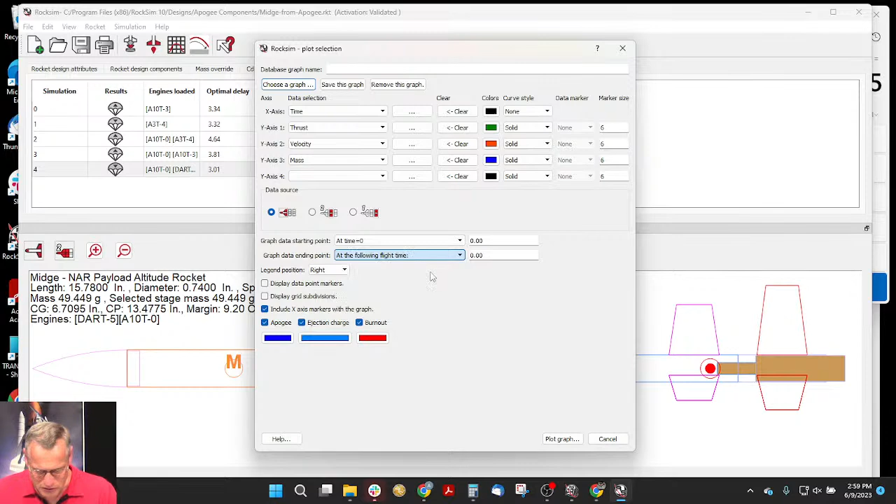Let's change this. See right here, after about 3 seconds, nothing changes. So let's change this to at the following flight time of 3 seconds. I'm just making it so the graph is bigger. Okay, so here's the rocket.

It starts out at a mass of 49.5 grams. And then the thrust is burning. You can see we lose a lot of mass right here. So we're really burning off a lot of propellant, and then we're coasting a little bit.

And then at this point, you see this big drop. So why would there be a big drop? That is because the booster stage fell off. So this right here is just the upper stage alone, which is about 41.6 or 8 grams right here.

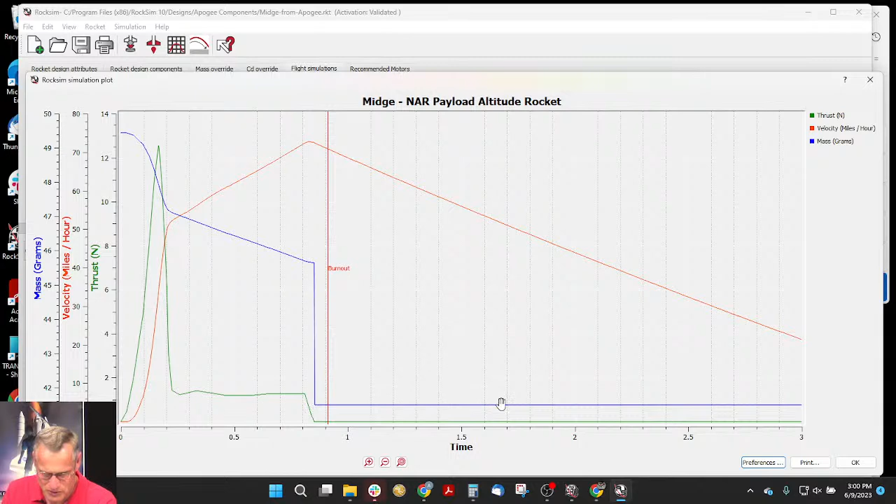So if I just display just the upper stage, it shows just about 41.5 grams. So as the booster dropped off, we started at 49 grams, it dropped off, and now we're down to 41 grams. So that is an unpowered, passive upper stage.

3D printer guy says, thanks Tim, I do have an old inkjet, so we'll have to use it again.

Cool. Let me see if I have lost any questions.

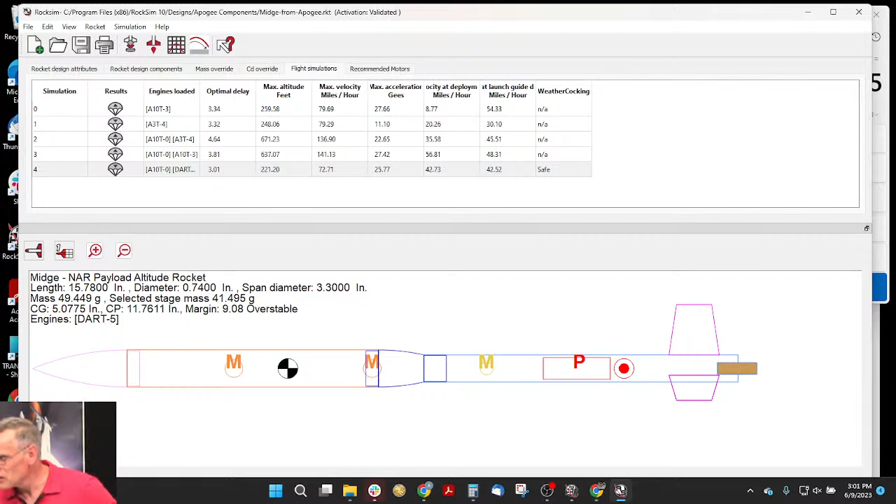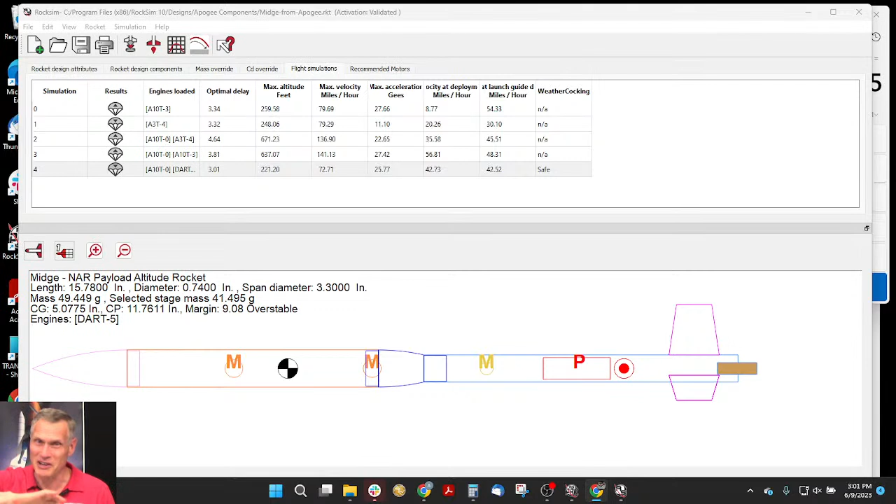Alfred Indy says Terry wants to place an animated GIF on his body tube and watch it play at launch. You can have a GIF, but it cannot be an animated GIF. RockSim is not that sophisticated. That would be kind of cool, where it's kind of like an LED display on the side of your rocket, or some kind of color changing. That's pretty. That'd be a pretty cool trick, though.

I think I got all the questions. So there was a lot of good questions. There's a lot of people here today.

Yeah, the casing with the spacers, that was kind of the hardest one. We also talked about coefficient of drag. Yeah, again, there's so much that we talked about. I appreciate everybody coming here.